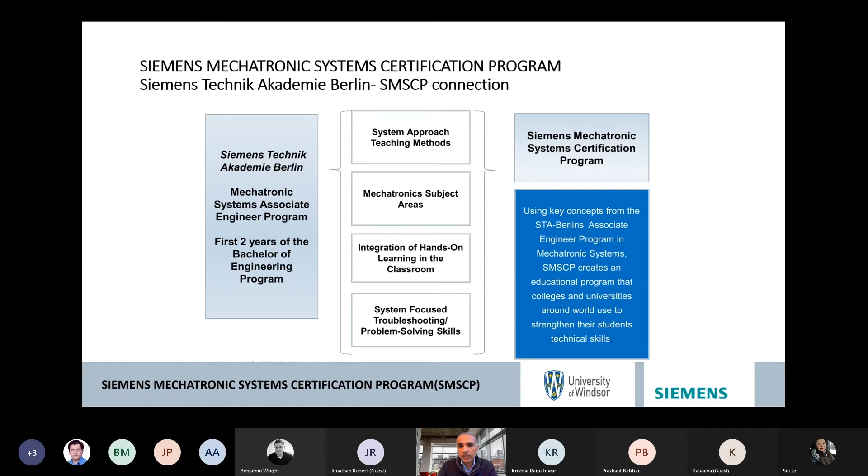So this is a very compact version of their associate degree program in mechatronics. They offer the SMSCP in three basic levels, and our focus today is just level one of their certification. Before I start the rest of my presentation on mechatronics, I have a recording from Siemens that I want to share with you.

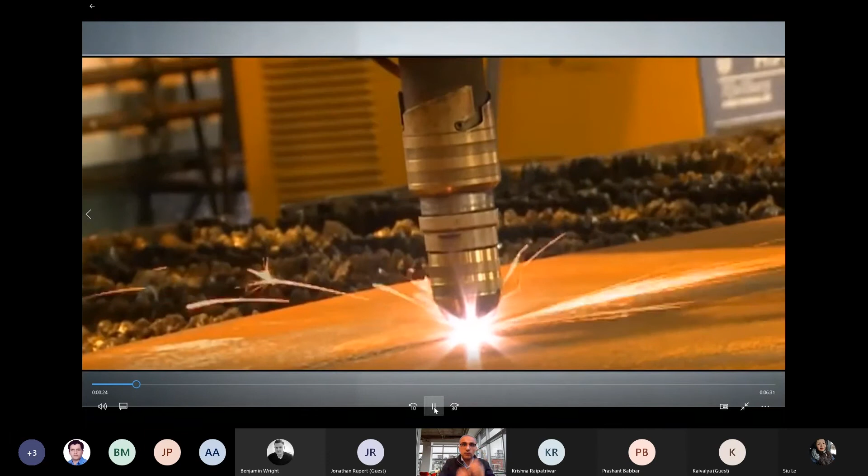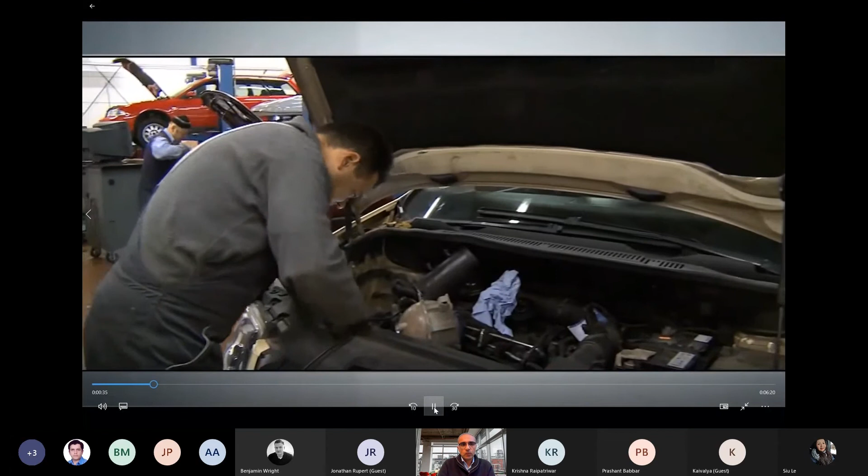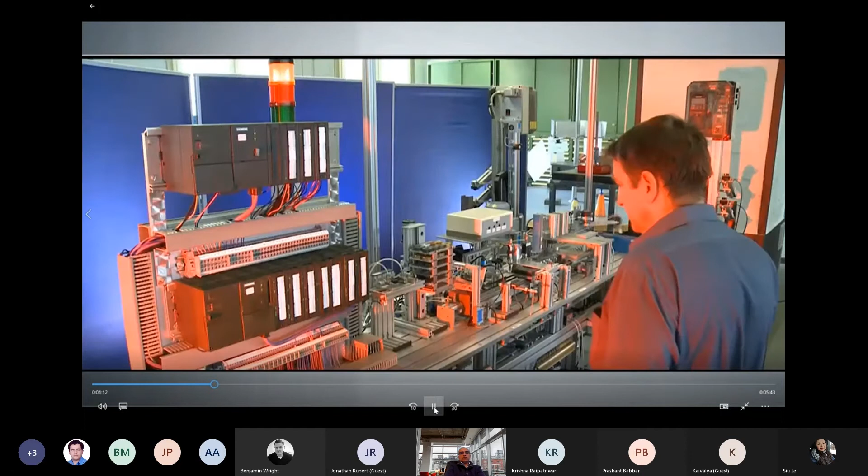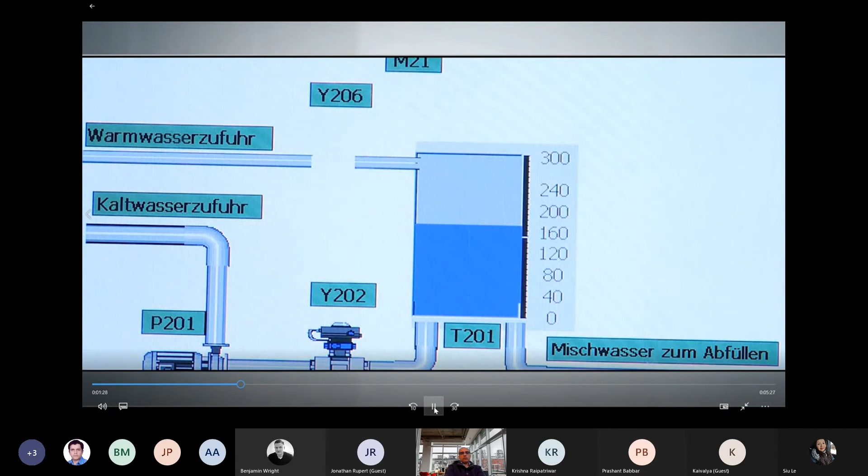Whether in manufacturing, aerospace, or renewable energy generation, complex technologies integrating electrical, mechanical, and computer engineering, better known as mechatronic systems, play an increasing role in today's industry. Consequently, mechatronics is a highly demanded skill by many industries worldwide. Future employees need global standards of technical skills and knowledge to handle complex systems. Working in today's fast-paced, high-tech environments, technicians and engineers need a holistic understanding of mechatronic systems technology, so they can respond smarter to new challenges of mechatronic technology. With its focus on systems-level analysis and hands-on learning, the Siemens Mechatronic Systems Certification Program helps create technical education programs that emphasize comprehensive mechatronic skills with a deep knowledge of troubleshooting and technical problem-solving. A key part of the success of SMSCP is the systems approach, an educational method.

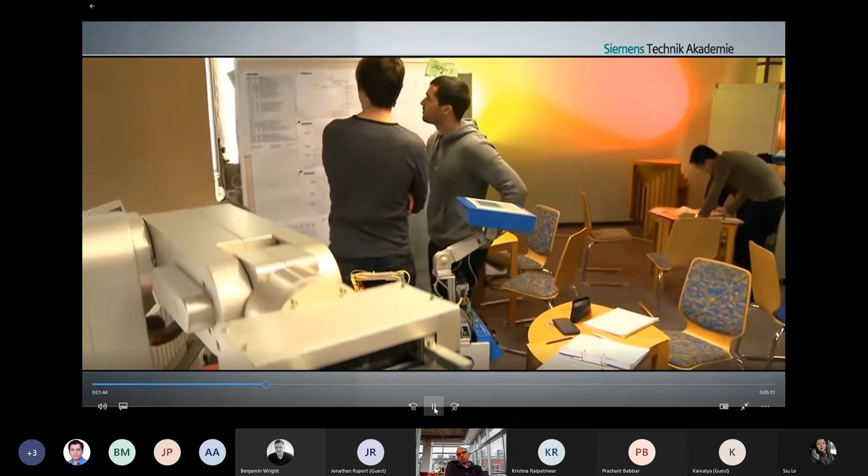This gives schools the tools to ensure that their students are ready for the real world. Listen as our master trainer, Gerd Voigt, discusses this concept and why it is an effective part of mechatronics education.

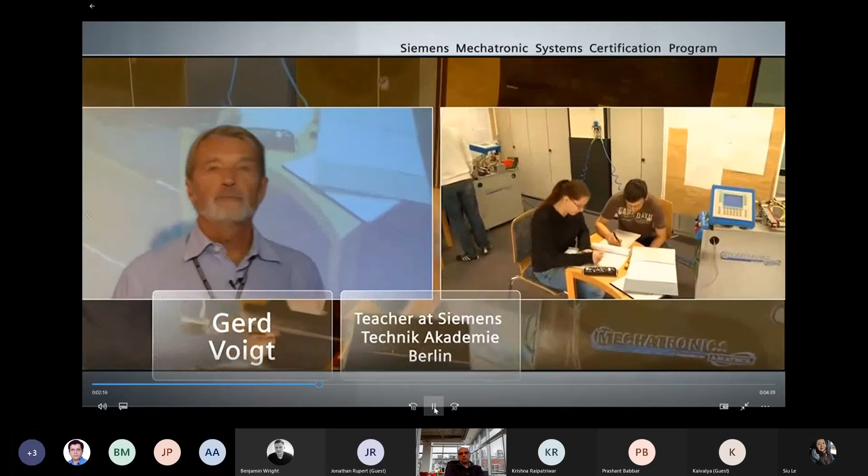You saw a troubleshooting lesson at a real system, specially designed for education purposes. Each module is a small but entire mechatronic system, and the core idea of the certification program is to learn the theory from a real system. In the next step, students have to transfer the knowledge they learn from such a system to another system to develop Handlungskompetenz, which means that students are able to quickly adapt to new situations, new systems, and new technologies in an efficient and flexible manner.

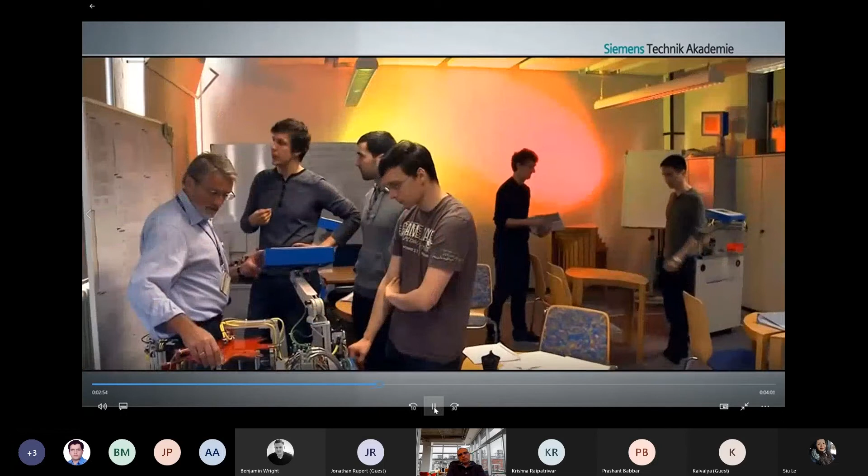How does the SMSCP help educational institutions prepare the next generation of technicians and engineers?

The Siemens Mechatronic Systems Certification Program is an international industry standard comprehensive skills certification in mechatronic systems, offered together with partner schools worldwide. It supports our partners in colleges, universities, Siemens regions, and Siemens training organizations worldwide. It is designed as a train-the-trainer program for instructors, enabling them to train their students in system understanding and practical exercises. Students will be enabled to handle complex production systems, and finally it will strengthen their own employability.

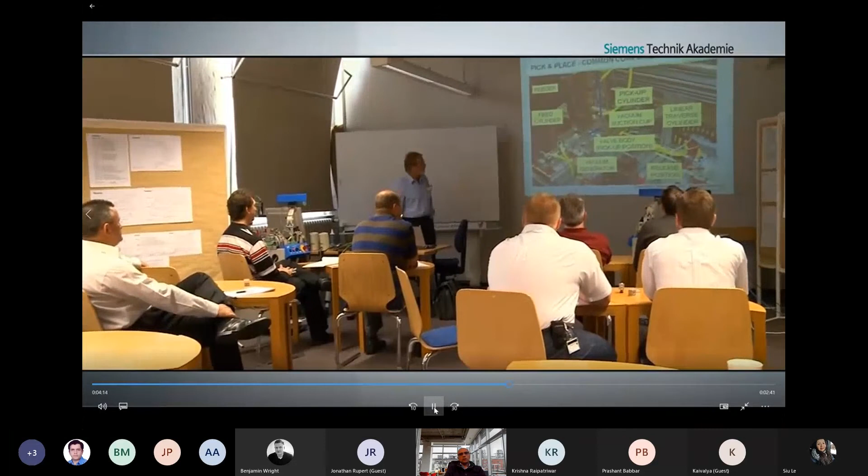During instructor certification courses, teachers learn how to apply the didactic method system approach to the field of mechatronics. The instructor certification course is very good, I think, because it has a practical element as well as a theory element, and I think that helps when you're trying to learn or trying to teach.

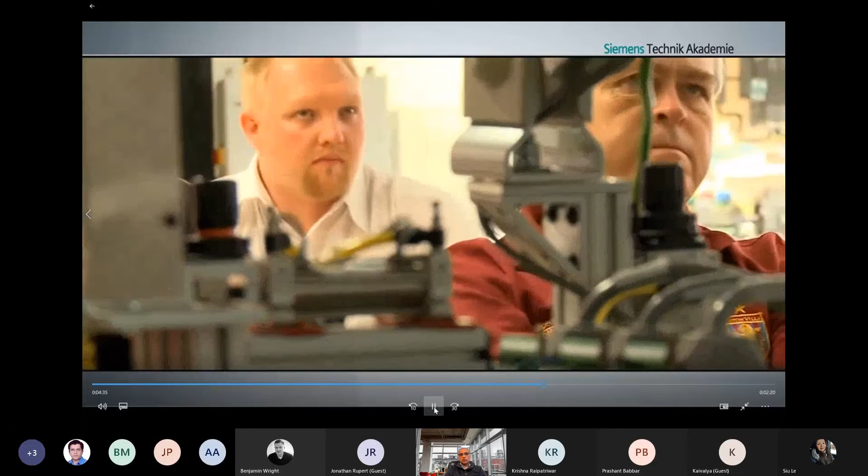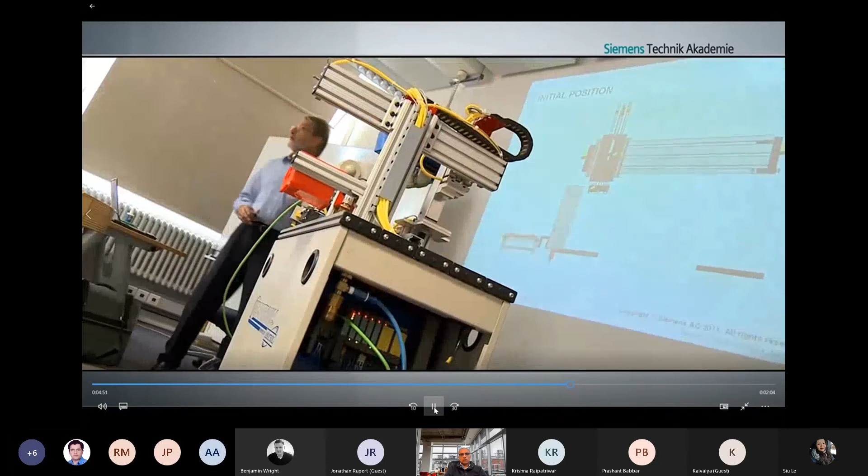Great situation they have in Berlin with the mechatronics training at Siemens. Coming from a South African background, the schools we've got don't focus as much on the practical as they do on the theory side. So looking at this course now, we focus very much on the practical first and then understand the theory behind it. Using the system approach, we have a very good outline and background before we actually get to understanding how the theory fits together.

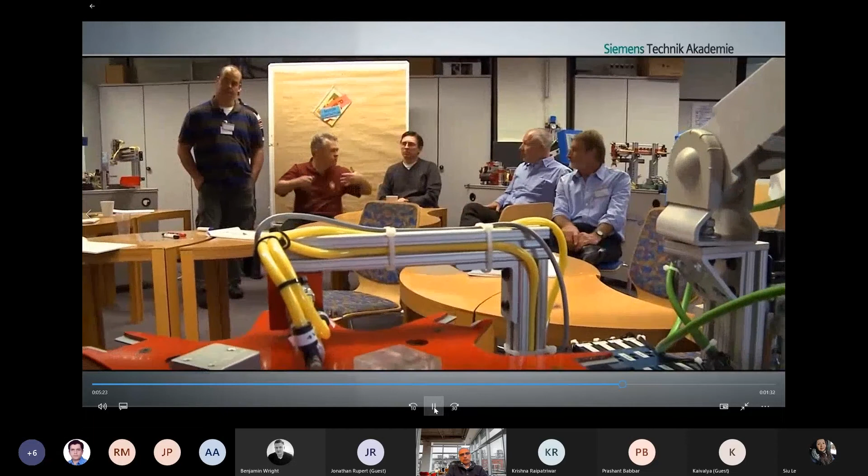The students have high motivation and are really keen to get to know the systems and take an interest. I think that's how this program is going to help me teach when I get back to the Black Country UTC in England. The program encourages us to put the students in real situations with real equipment. This in the future will help them get jobs in the UK.

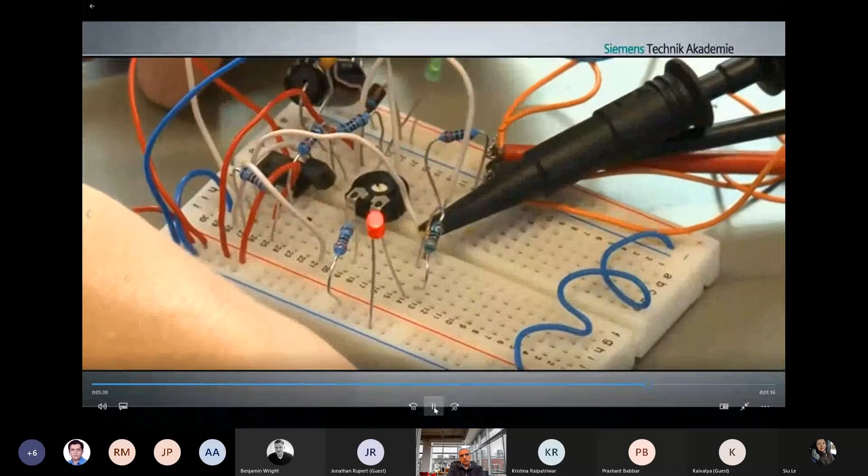Once back at their colleges, instructors help students prepare for the Siemens certification exam in mechatronic systems throughout their normal study program. With its focus on troubleshooting and practical mechatronic skills, the Siemens certifications offer students clear advantages over the competition in the job market.

Within the SMSCP, I learned how to find faults in a mechatronic training system and how to apply this knowledge to a real industrial line. Now I'm confident that I will be successful at my job in the real industrial setting.

The way our teachers teach the SMSCP courses is a lot of fun. We are always taking things apart and trying to figure out how to troubleshoot the different parts of a system in class. This keeps these things very interesting.

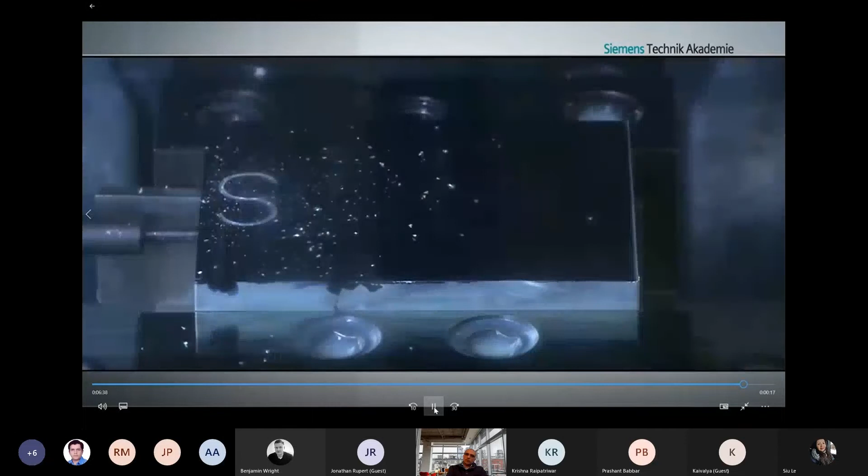Siemens Mechatronic Systems Certification Program, the international industry standard comprehensive skills certification.

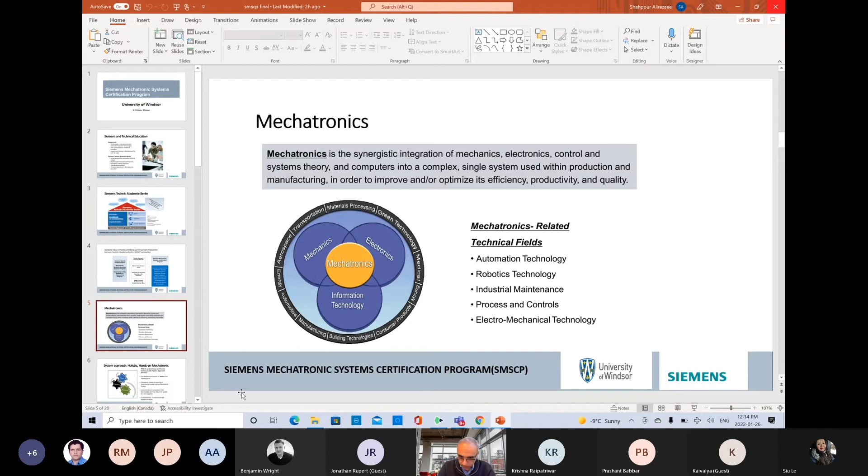Okay. After watching this recording from Siemens, I will continue on my slide.

As you all know, mechatronics is not a new discipline. It's a combination and integration of basically mechanical engineering, electrical or electronic engineering, and information technology and computer science. So whenever you have such a complex system with an integration of these, you can look at the system as a mechatronic system.

There are many applications in different areas, like material processing, green technology, medical and anything related to biomedical engineering, mining, consumer products, building technologies, manufacturing, automotive, energy sector, aerospace, and transportation. These are all examples of mechatronic systems. Anything related to automation technology, robotics, industrial maintenance, process control and process automation, and electromechanical technologies can be categorized under mechatronic systems.

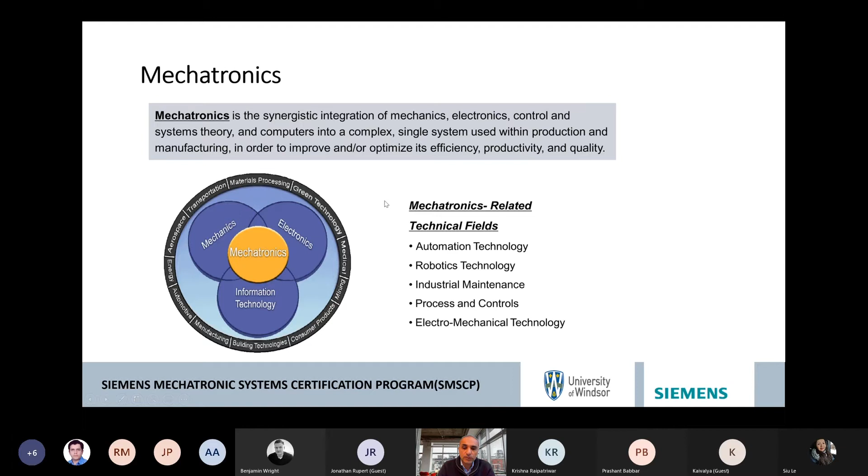The system-based approach developed by Siemens Technik Akademie is a new way to train their students, through hands-on work and starting from the system first, focusing on the system, and the mechatronic system is always the core. So basically what we do is focus on the actual mechatronic system. Let's say this is a system which is a mechatronic system.

So we first give that system or module to you as a student and ask you to work with that system and try to understand the concept by using and applying that system, and then ask you to have a presentation for your classmates.

So everything starts from the mechatronic system, and the main task as a student is you are supposed to start working, thinking with that mechatronic system and try to understand the concept behind it, and then try to explain it to the others, and then use the same system to expand to other systems, and finally we go to the theory and the background that we need for that.

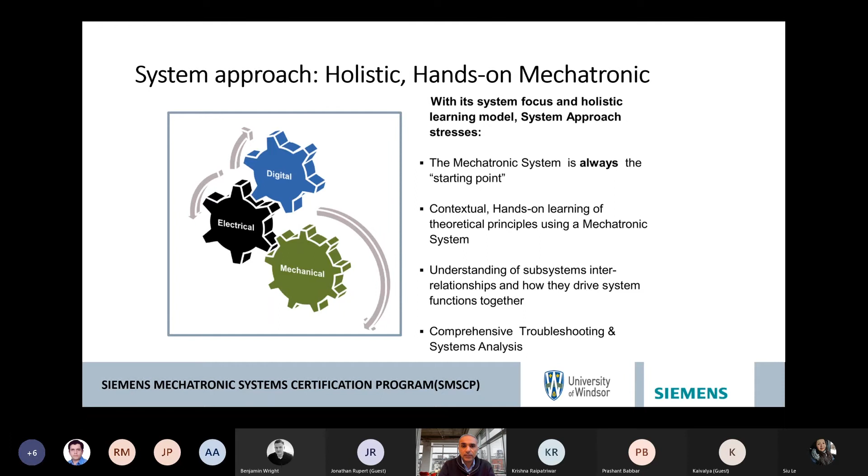Even if there are some modules or components that you haven't seen at all, I will give it to you and you can start working with them. Sometimes it's very hard for you to even work with them as you don't know the name of that module, so we help each other to at least have a better learning, a system-based approach learning.

So as you noticed in that recording, that video, the core idea is our mechatronic system, and we look at every mechatronic system as one module. So let's say we have one module, which can be our sensors or actuators or whatever we have in that course.

After selecting, choosing that module, we go to see the application of that component in the system. Let's say here is my inductive sensor. So I consider one inductive sensor as my module, and then we go to see the application of that module in our actual system, and then we go through the characteristics and the design function of that in the system, trying to understand the principal physical characteristics or whatever knowledge we need in terms of that specific module.

And then we try to understand, or possibly sometimes manually cause some malfunctions in that system, and try to find that malfunction, or try to do the troubleshooting in different ways to make that system functional.

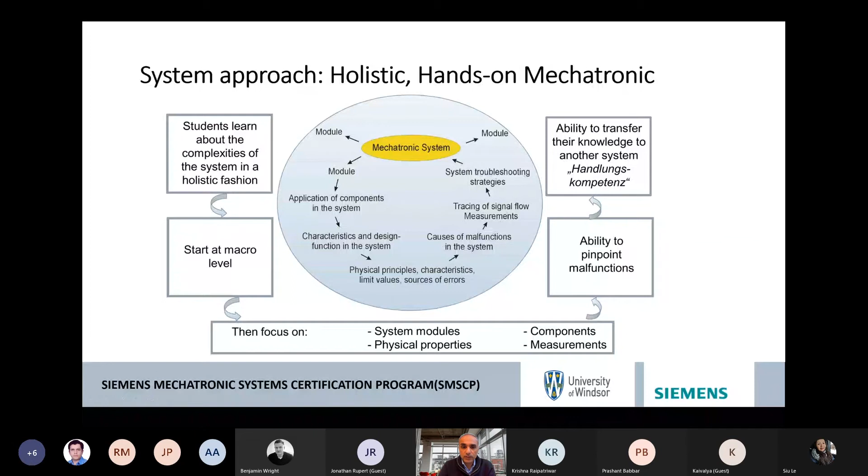So there are many reasons why we are looking for an SMSCP, and everyone has their own reason. But in terms of Siemens, this is going to be a kind of integration of expertise that we need for mechatronics, for automation technologies, and the SMSCP is trying to bring all these things together through the 3 levels of education that we'll explain later.

So the target is to have well-trained, skilled technical workers. I know possibly some of you are even a PhD student, or maybe have completed your PhD or master's, or some of you are undergraduate students. Regardless of your degree, we are here to teach you how to work with that mechatronic system station, and we consider all of you as a technical worker.

So we'd like you to be a kind of technical worker at the end. And also, the education that we have, the SMSCP course related to this, still maybe some of you may feel this is going to be a little bit expensive, but comparing to the similar programs, similar trainings that we have in the industry in this field...

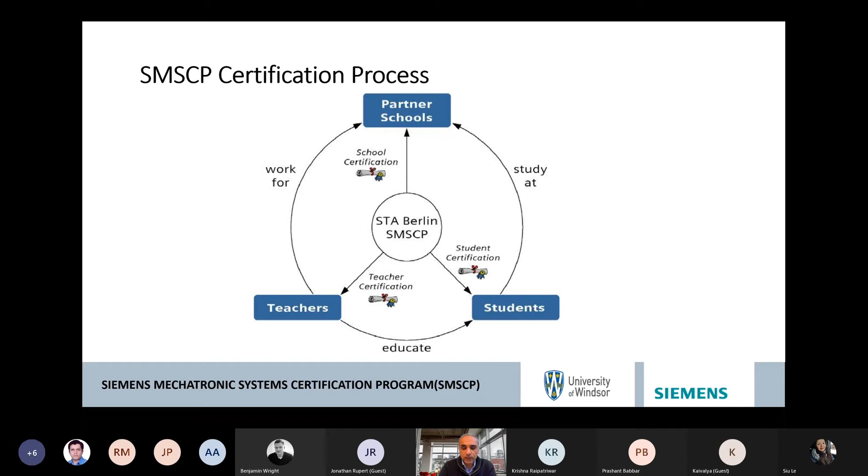So you receive that certification, but within the university we also provide you another certificate of completion. So far, most of our students after completing the program attended the examination, and so far we've had only one person fail. The University of Windsor was, I guess, the first university in terms of success rate in all the examinations they had before.

As I mentioned, there are different levels of education and training for Siemens, and the goal is to prepare students for the working environment, basically preparing technical skills and preparing a technician to be able to approach the market. Typically, whatever you need within this industry is going to be covered within these three levels of training.

The first level, which is the focus of this session today, is called the Siemens Certified Mechatronic System Assistant. This level emphasizes efficiently operating complex mechatronic systems, troubleshooting, and foreseeing problems. Typically in level 1, we are not looking at the design aspects of a mechatronic system. We only want you to be a technician, able to work with the system, whatever the module is, understand the system, apply installation of that system within your bigger mechatronic system, and then perform troubleshooting and problem solving.

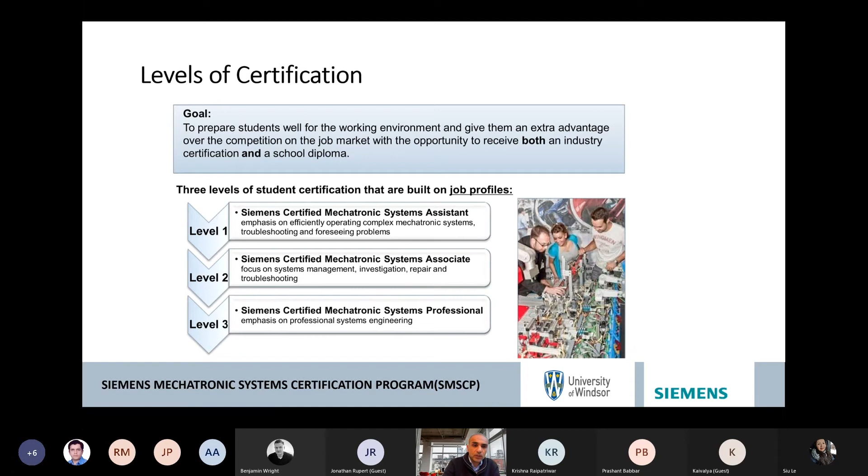And in level 3, the certification is called system professional. It's going to be very high skilled, more of the design, not application involved in this level 3. We assume that you have all the knowledge for performing that unit or module, and you know how to basically develop that system. But in level 3, we work on the development of that system, design, and high level of technical things that is needed for that system.

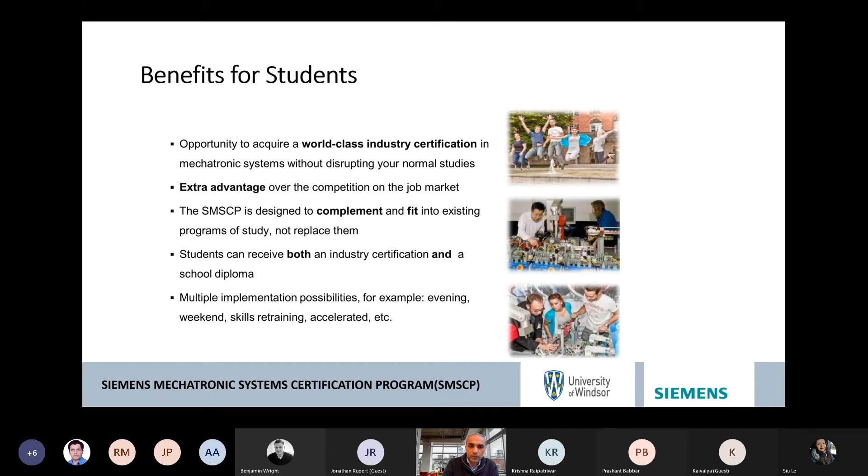As I mentioned, you can receive 2 certifications on completion of your hours if you successfully pass the exam and also attend all the course classes that we have. In terms of implementation, there are flexibilities for this program, and if you look at different locations in the world, they are offering the program at different timings. Our program is mostly focused on Saturdays and Friday afternoons, so I guess most of you can attend the classes, as most of our hours are basically on Saturdays.

So in terms of level 1 courses, as I mentioned before, in this level we have 4 courses: electro-pneumatic and hydraulic control circuits; mechanical components and electric drive; electrical components; and finally digital fundamentals and PLCs. In terms of our first course, electro-pneumatic and hydraulic control system, which Dr. Jalal covers, the course covers basics of pneumatic, electro-pneumatic, and hydraulic control systems.

You would learn how to read and analyze a hydraulic or pneumatic circuit, and be able to follow this circuit and perform troubleshooting. So at the end of this course, you are able to understand what a mechatronic system is and the relationship of the components and modules within that system, with a focus on electro-pneumatic and hydraulic control circuits. You would understand the role of these systems in complex mechatronic systems and subsystems, and you should understand troubleshooting, maintenance, and safety issues related to these circuits.

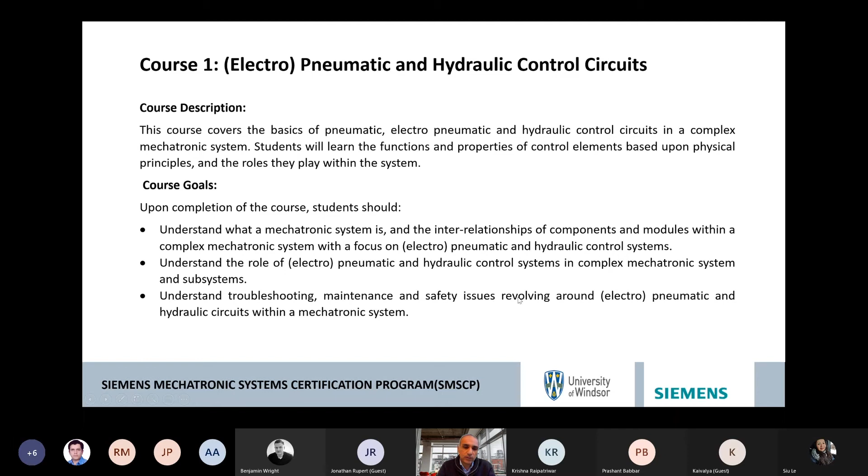The other course that should be covered here is mechanical systems. It's the course where you will learn the basic function of the physical properties of mechanical components, electrical drives, AC and DC electromotors, and these types of components and modules that we definitely need in any mechatronic systems. At the end of this course, you should understand the role of mechanical components and electrical drives in complex mechatronic systems. You understand the flow of energy in that system, and you are able to troubleshoot and do preventive maintenance and safety related to mechanical or electrical drives and electromotors within that mechatronic system.

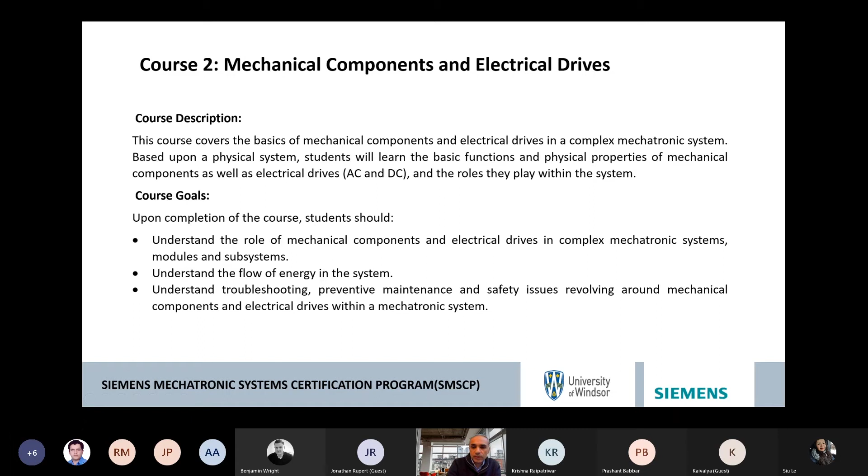In terms of the other course we have, electrical components - this is not an electrical circuit course, although we cover electrical circuits and the concepts, but our main idea is to see the basic function of those electrical components and their role, and basically try to apply them. At the end, you should understand what mechatronics is and the relationship of the modules in terms of electrical components. You should understand the flow of energy, mass, and information in that system, and specifically with the focus of electrical components, you should be able to perform troubleshooting. If that's a sensor or any electrical component, you should be able to know how to troubleshoot and find the issue within that specific module. If there is a possibility for maintenance or repair, you should be able to do that, and any safety or related issues within that system should be covered here.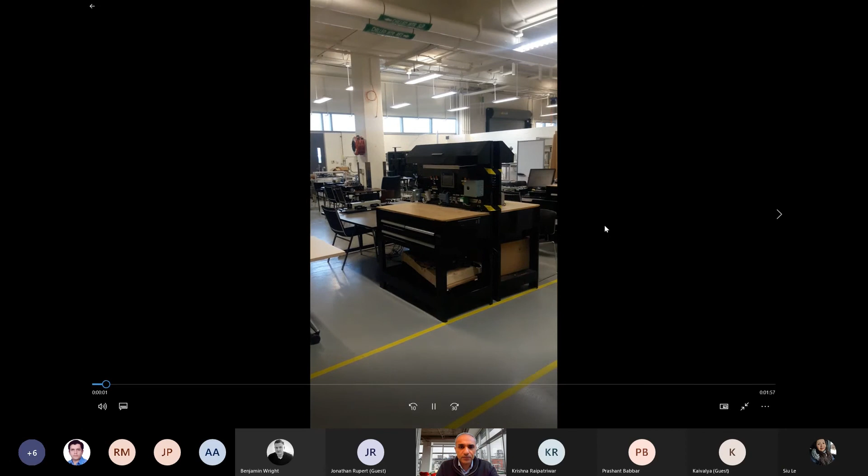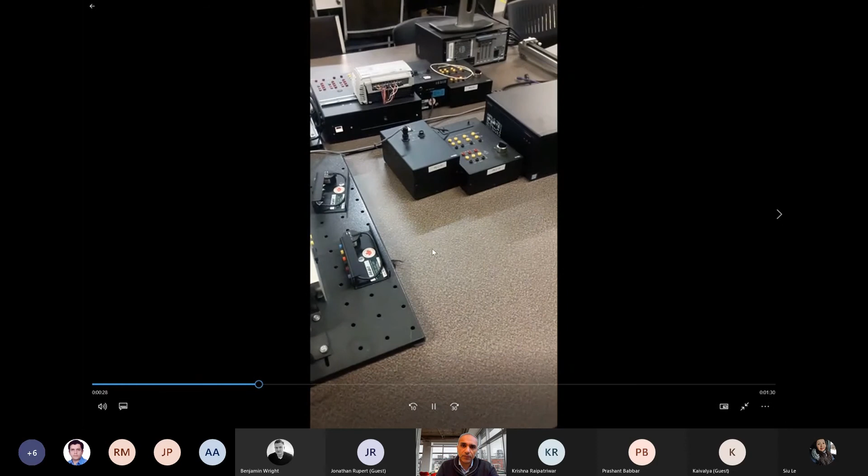Okay, so here is the lab environment, we call it mechatronic lab, or some people call it PLC lab. As you see, we have stations equipped with the Siemens 1200 and the HMI, and this is our main panel that we work, and there are some attachments that are needed for your system setup when you work with the PLC.

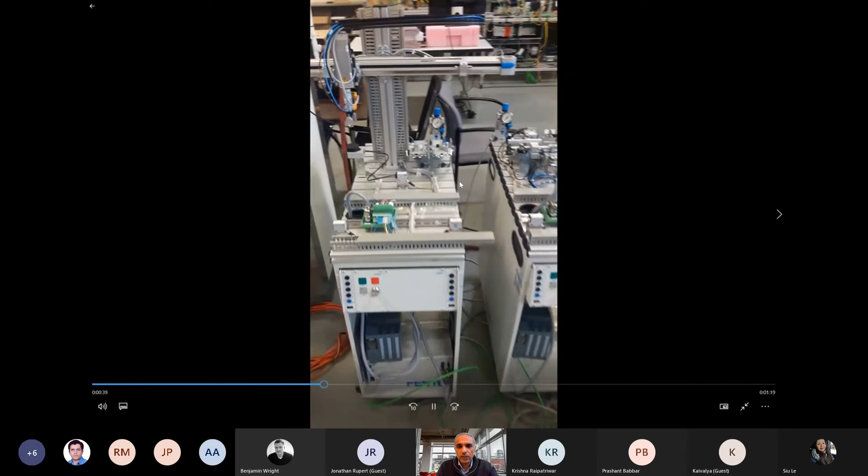And here are our Festo stations. These stations are a really compact version of a kind of industry application. So this is, let's say, for instance, a sorting station. Let me come back here, if I can pause the system.

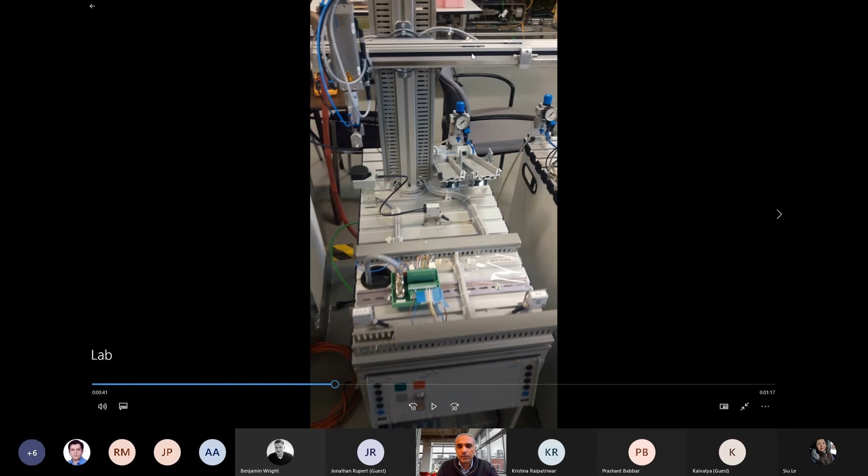So for instance, this is one station, which is the pick and place. The whole idea is there is an object sitting here. The sensor detects the part object. There is a kind of grabber here, comes and picks the object, and this cylinder moves this object from this point to this point, either put it here or drop it here.

This is a simple example of a sorting station that I have, with this little conveyor, and there are a couple of sensors sitting here, and they detect, let's say, 3 types of objects. If I want to direct the object to this sorted line, I can put it here. So by these sensors that we have here, we determine the type of the object, and either we forward it to this line or this line or this line. So you see a very small compact version of the actual job that you can see within the industry.

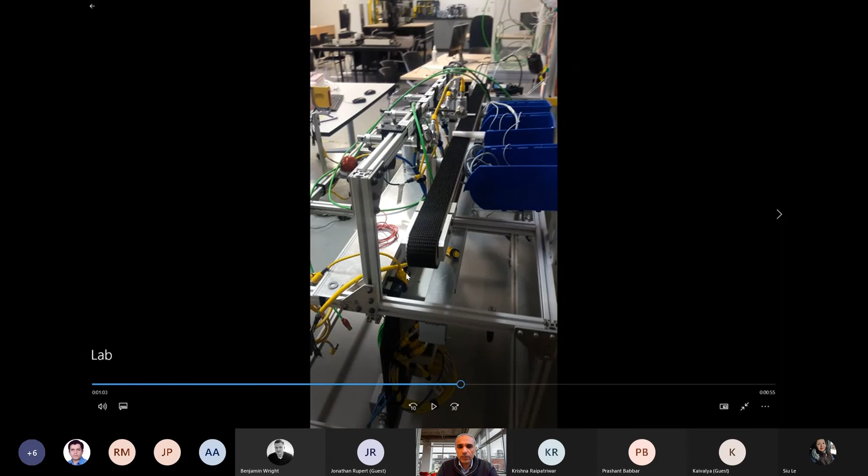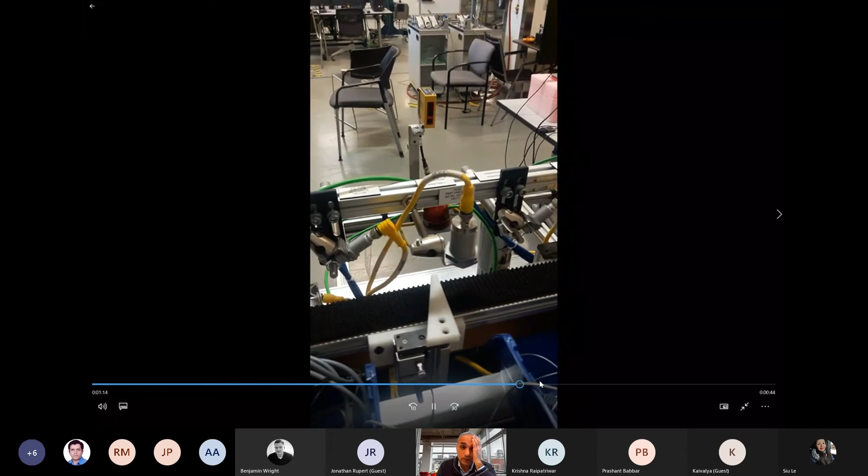Another station, this one has been developed by one of our team of students within the university. Again, we have just a sorting station. There are 4 bins, and we detect different types of parts, materials, and sort the materials and put it into one of these bins. So you see different sensors and pneumatic systems.

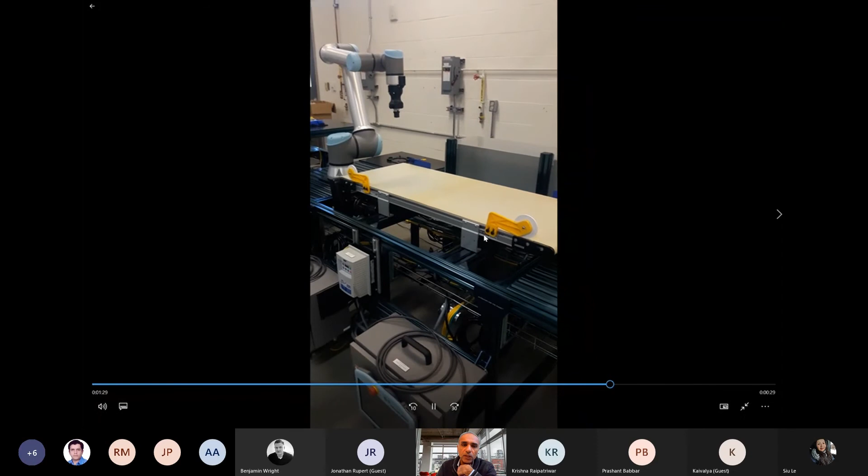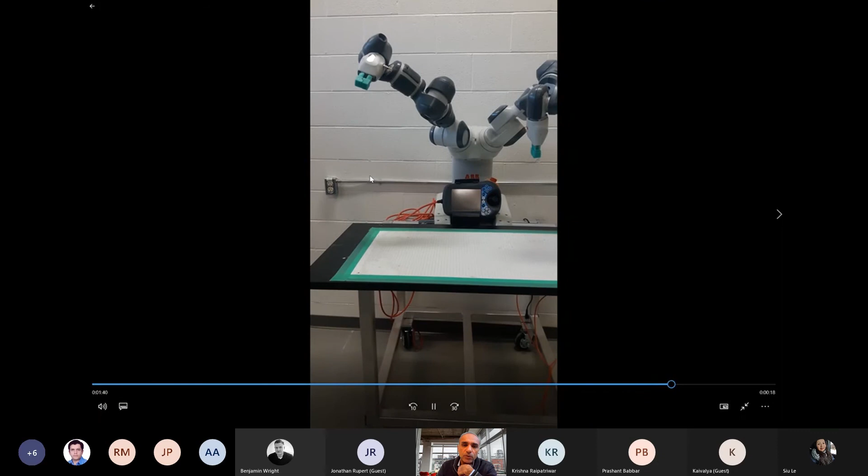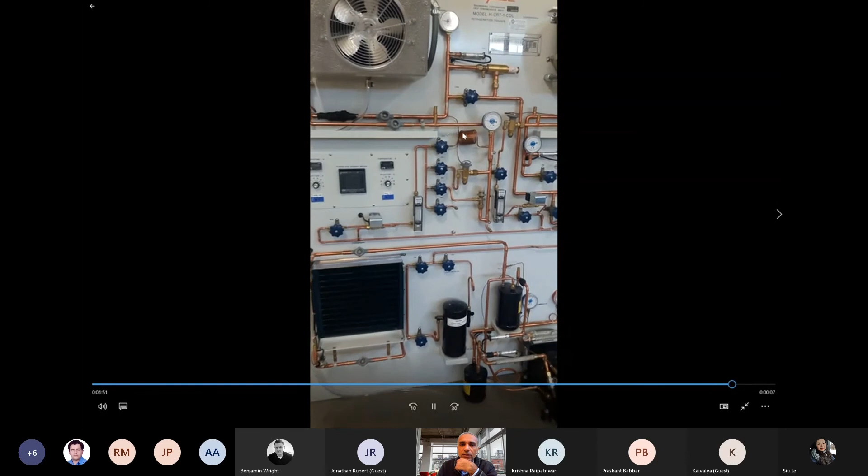And here we have our universal robot stations. This year we have the option to focus on robotics and robot training, so I assume possibly 2 to 3 weeks training on the robots. So you have a chance to work on the actual robots and perform programming on that robot anyway. And this is another station that we have, like a refrigeration system. So these are all kind of general overview of our lab. And Siu, I guess I'm done.

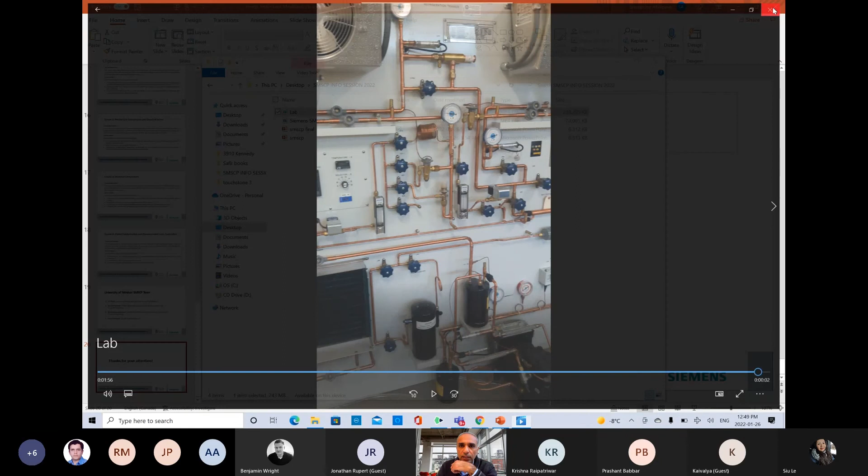I can wait for the questions after your presentation.

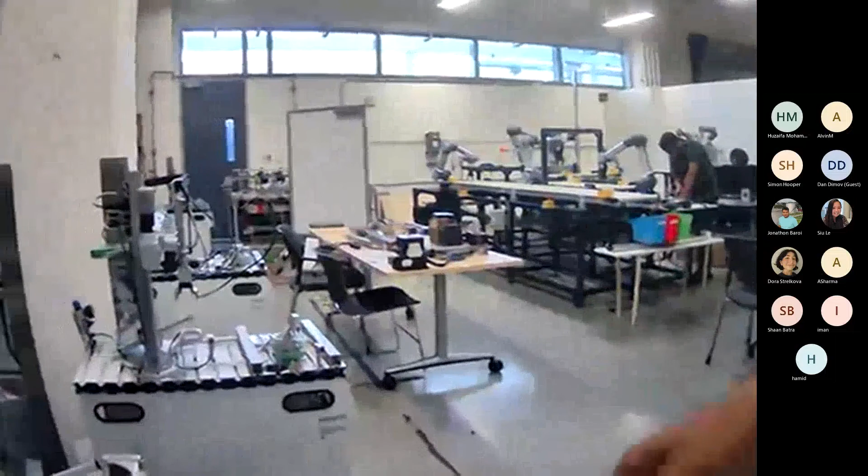As you see in this section, I'm just moving my camera. We have our PLC stations. In here, let me move. We have the flexible automation section, and there we have the robotics section with 6 of those universal robots plus a Yumi robot.

There are a bunch of software that I can't show on my laptop. There's software from Siemens - the Siemens TIA portal is one of them, and it's very important. The other software is Factory IO, which we use for simulation purposes, and many other software for those robots as well are part of the training.